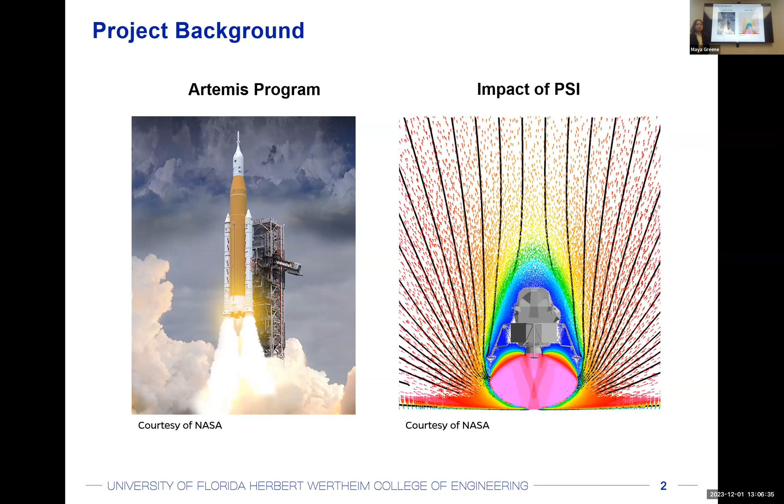Two of the major effects we see are cratering on the surface, which you can see on the bottom of this figure, and ejecta dynamics, which are represented by the red specks in the simulation.

The ejecta dynamics can cause a whole host of negative effects, including creating low visibility for crews during maneuvers, impairing the performance of sensors, damaging structural integrity, and reducing the functionality of mechanisms on the lander. You can see this in the sandblasting of metal surfaces and kicked-up dust getting into mechanisms and clogging up moving parts like gears or sliding rails.

The cratering can also cause a significant issue because it can create an uneven landing surface. For example, the Apollo 15 mission almost failed because one of the legs of the lander landed in a small crater, incidentally also due to low visibility during landing because of the lunar dust. That caused a tilt of almost 11 degrees, which was nearly a mission failure, since the criteria for failure was a 12-degree tilt.

When we consider all those negative effects of lunar dust, that it can damage critical components on the lander or directly lead to failure, the business case is straightforward for the CraterGators' lunar dust mitigation device. It's difficult to estimate the exact cost of a catastrophic failure of the lander due to the regolith, but the contract for the Blue Origin HLS was worth $3.4 billion.

The predicted cost of the proposed CraterGators dust mitigation system is $135,000, which, as we can see here, is a nearly negligible cost relative to that contract for a rather significant payoff in terms of risk mitigation for the mission.

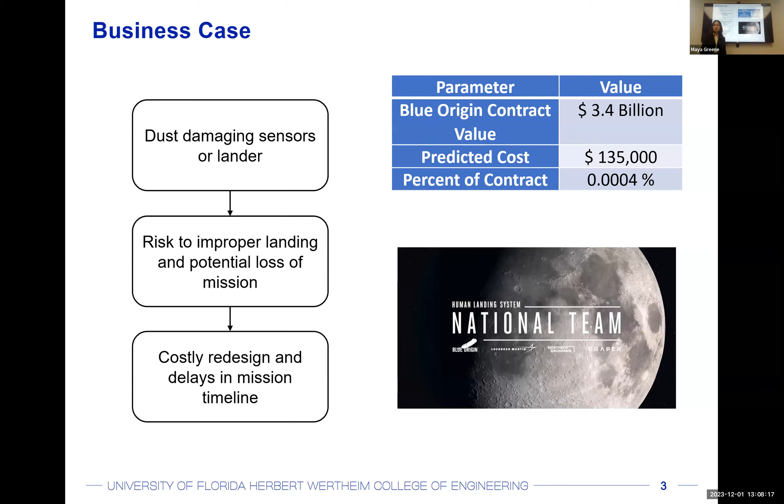When CraterGators went about brainstorming solutions for our dust mitigation device, we had to come up with the critical requirements for this Artemis 5 mission for the national team.

When thinking about these requirements, our number one concern was avoiding as much added weight and cost to this mission as possible. The more weight, meaning more mass on this big HLS system, the more expensive it is going to be. We do not want to create any more added cost to the national team than necessary.

We also wanted to avoid non-renewable resources, and avoid adding any motion or robotics that could get damaged from the regolith. Avoiding this added motion and robotics will make the device very simple, which will minimize as much as possible any damages we might experience. If it's a simple device, it will be a simple fix, with fewer components at risk of being damaged by lunar regolith impact during ascent, descent, and landing.

Additionally, we wanted our device to be flexible to any changing lander designs. As you can see here, we included a few different lander mock-ups, and the design has changed iteratively during the design process. We do expect there may be other engineering design changes as the national team evaluates their lander design up until the launch of Artemis 5 in a couple of years.

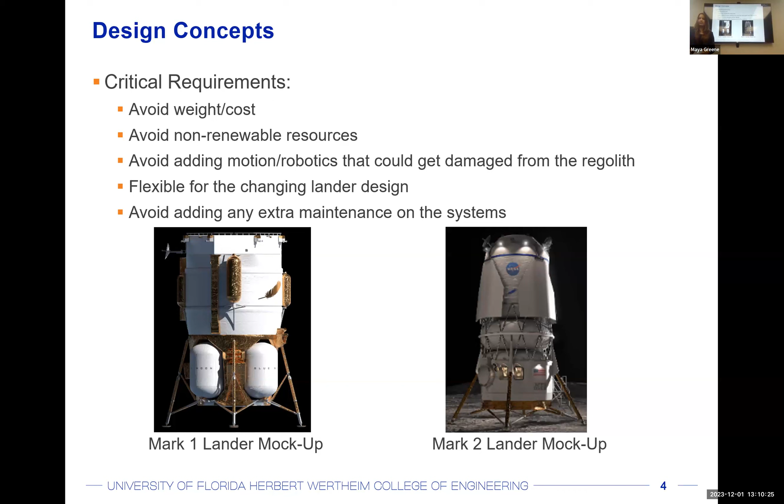Additionally, we wanted to avoid adding any extra maintenance on the systems. If there are any failures of the dust mitigation device that CraterGators proposes, the astronauts on the moon will be in charge of taking care of any maintenance solutions they would have to come up with. So with a simple design, we want to mitigate any sort of action required for the astronauts when we're on the moon.

Our proposed dust mitigation device by CraterGators consists of a deflection attachment and carbon nanotube (CNT) fabric. As you can see here, our dust mitigation device is located on the aft of the lander.

And here you can see our deflection skirt, our undercarriage dome, and our CNT fabric, which will be attached to the lander legs. The deflection attachment, like I mentioned, consists of a deflection skirt and undercarriage dome. This undercarriage dome will be located at the very bottom of the lander. And later on in this presentation, you will be seeing the details of how we go about adjusting for the exhaust nozzles that will also be located on the bottom of the lander.

Additionally, the deflection skirt protrudes outward right here, and this motion right here is meant to allow for regolith flow to move past our lander and thus mitigate any sort of lunar regolith impact on the base of the HLS. This carbon nanotube fabric will be secured to the lander legs via polyimide tape at the ends, which will allow for the fabric to extend along the legs when landing. The legs will retract during landing.

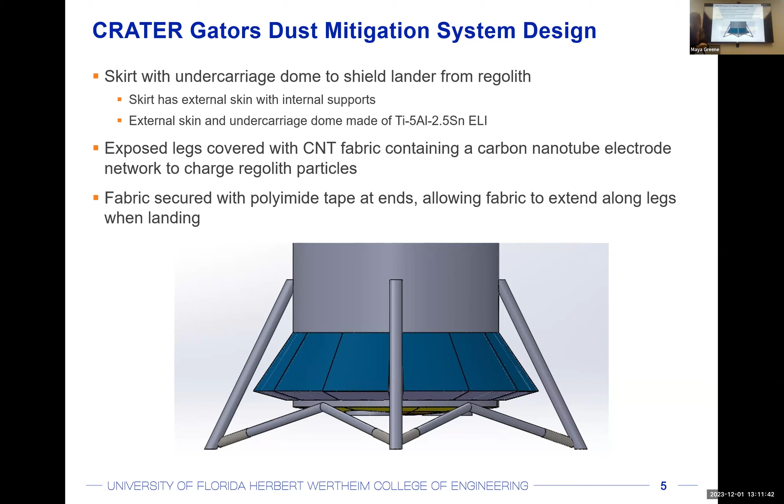So going a little bit more in depth with our deflection skirt. The objective of our deflection skirt is to deflect the regolith from hitting the lander body and also any critical components like sensors that may be on the bottom to assist with landing. In terms of geometry, here's a cutout. It's one quadrant of our deflection skirt. So we have 4 quadrants going all the way around the lander. It's made up of these 3 pieces.

We have a thin exterior skin that is connected to our interior supports via welding, and then the interior supports are then welded to the lander itself. So we have one quadrant, and then there's a lander leg on each end of the quadrant. And so then to protect against any sort of regolith intrusion based off of these quadrant separations, we have shields on the outside of these interior supports to prevent any regolith from infiltrating the system. Additionally, these are made out of a titanium, tin, aluminum alloy.

And so then for sensor recession, we wanted to make sure that our sensors that may be on the bottom to assist with landing are safe from regolith flow. So the way we went about protecting them is based off of the orientation of our skirt on the lander itself. So we see that we have a little bit of a cavity here for our sensors to fit.

So what we're expecting is the regolith will flow from the surface of the moon outwards and hit this corner of the lander itself. And based off of flow over a ledge, it will then flow past the ledge up until it hits the next ledge, which in this case would be this outer bottom edge of our deflection skirt. So that is therefore leaving a cavity here for our sensors to recess inside that stagnation point and prevent any sort of regolith interaction with those sensors.

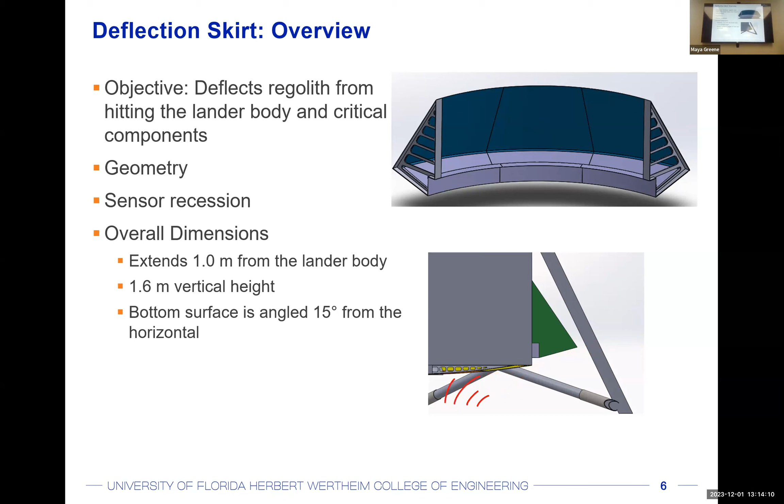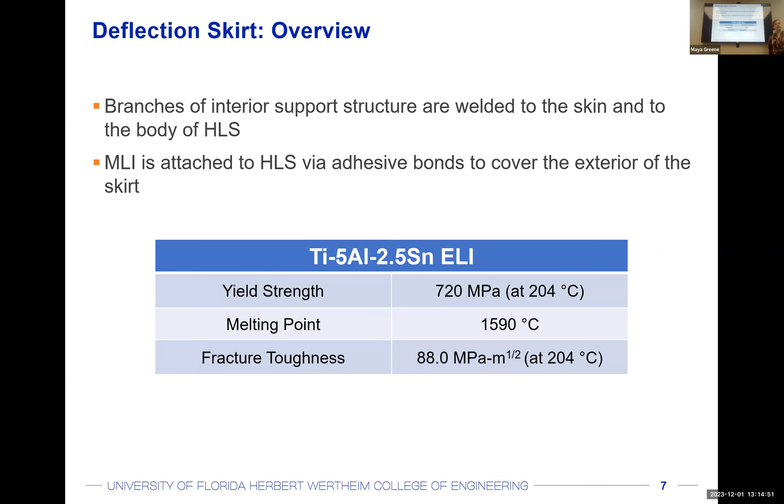Okay, and then I mentioned before that the branches of the interior support are welded to that exterior skin, and then the interior supports are then welded to the HLS itself. And then, as I mentioned as well, the MLI is attached to the exterior skirt with adhesive bonds and covers that entire exterior skin. Here are some material properties of the tin, aluminum, titanium alloy that we chose for our deflection skirt. So we have a high yield strength and a high melting point for any sort of thermal interactions that we will face on the moon, and then fracture toughness in the case of impact from larger regolith particles.

Hello, I'll be discussing one of our static loading cases that we did to ensure that our device wouldn't fail during operation. I'll be discussing the outer skirt as it curves around. In order to simplify the problem so we could perform these calculations, we stretched out the curved shape into a straight beam. We calculated the length of this beam using the angle that it is traveling around and the radius of the section.

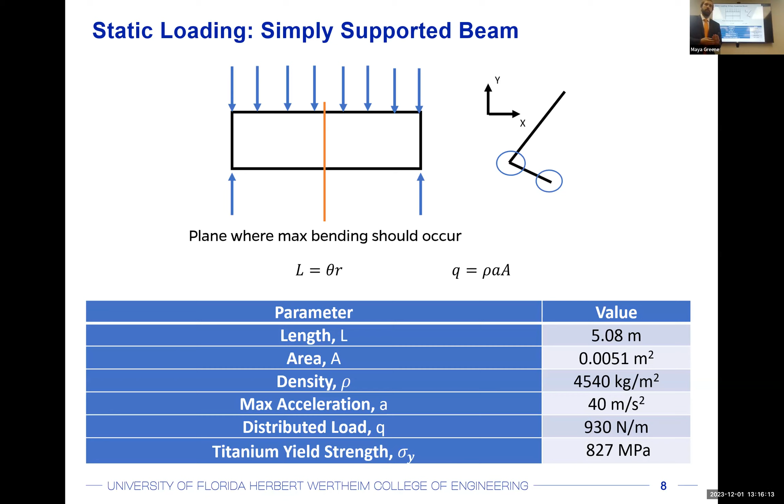And then for the loading, it was a distributed load across the length of the beam with simple supports on either end. Bending was assumed to cause maximum stress, and the plane of maximum bending would be in the center of the beam. The load was calculated using the maximum acceleration that we predicted our device would see, which would be during launch from Earth. We used the maximum acceleration from the SLS launch vehicle, and while the Blue Moon lander will not be flying on the SLS, the New Glenn vehicle does not yet have data published about its potential max acceleration.

Additionally, due to the open cross section that the beam has, we had to take into account the products of inertia as well as the moments of inertia, and multiple points. We calculated the stress at multiple points along the outer edge to ensure that we found the point with the maximum stress. The point that we had the maximum stress was the far left corner of the beam, and had a stress of 5.35 megapascals.

This provided a factor of safety of 154, which is a very large factor of safety, much higher than the industry standard of 1.5 to 2. But we deemed this acceptable as we were more concerned with the potential failure during fatigue or crack growth analysis, as well as the thermal cases.

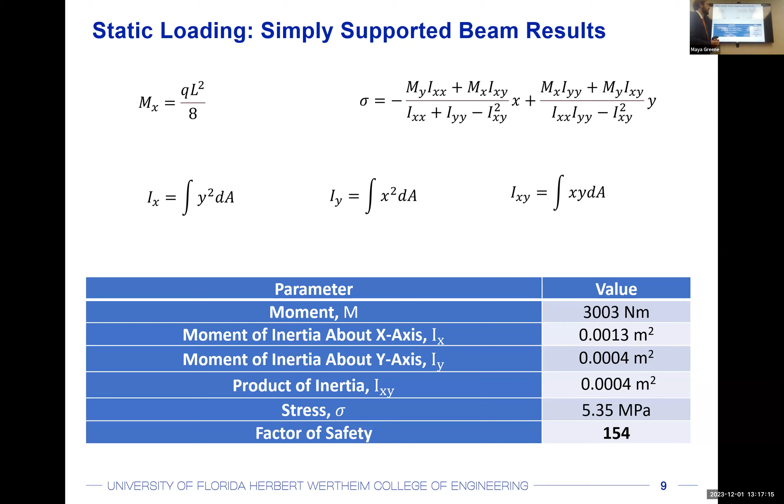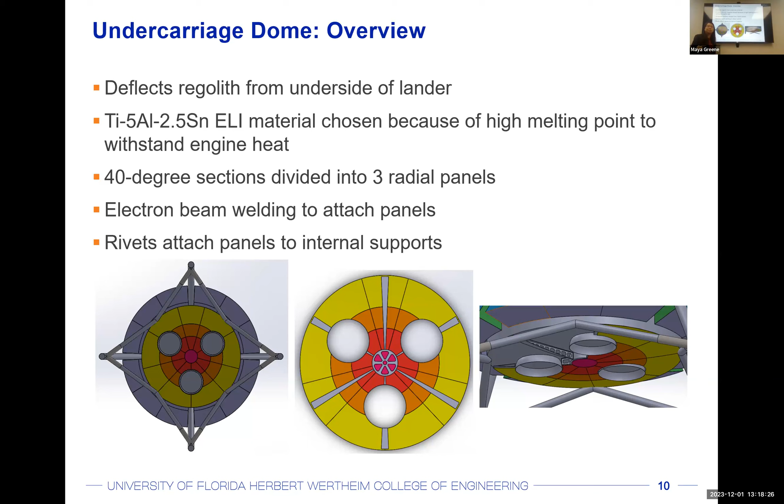A static loading case was performed for the undercarriage dome, just as we performed it for the deflection skirt. So in this case, we simplified the skin of the undercarriage dome for analysis purposes by removing the hole cutouts for the engine bells, as well as flattening the skin.

From there, we determined the distributed load Q as a function of the density of the titanium alloy, the thickness of the skin, and the maximum acceleration that the undercarriage dome would experience, which again, just as we did for the deflection skirt, we determined would be the G's felt during SLS launch.

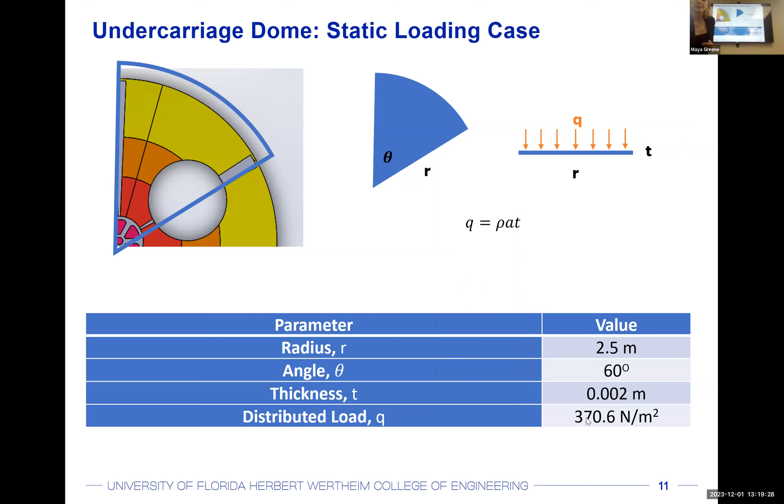From there, we were able to determine the equivalent von Mises stress using the tangential stress, the radial stress, and the weld factor, which we estimated to be 2.

From there, we calculated the safety factor as a relationship between this von Mises stress and the yield strength of the titanium alloy. And we determined a safety factor of 3.4, which, although is higher than the industry standard of 1.5 to 2, again, we were mostly concerned with how the design withstood cyclic loading as well as thermal loading, so we deemed this acceptable.

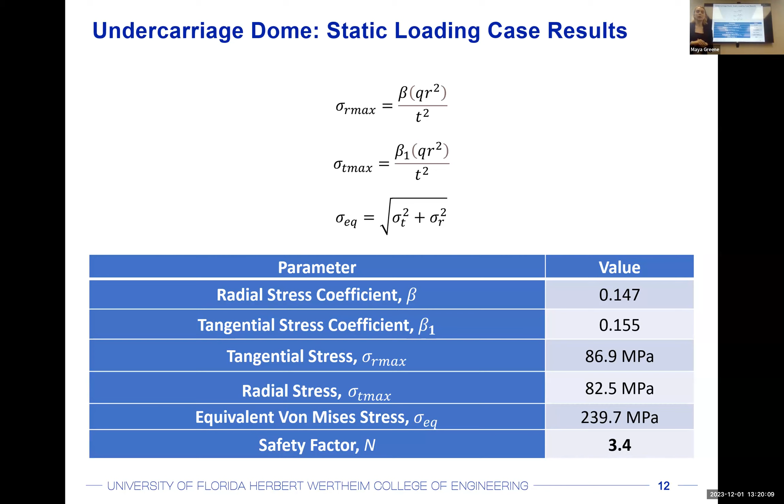Like Rita said, the most important structural analysis that we took the greatest stock in when we were performing our analyses was a fatigue loading case. Fatigue in this case and cyclic loading was defined not as repeated ascent or descent of the lander, but rather as impact coming from the regolith itself repeatedly during descent.

For this case, we needed to establish a load case, which given the wide range of sizes of regolith that the moon has, we wanted to go for something that would create a significant enough load to cause an effect without being so large that it wouldn't actually be kicked up during the surface plume interaction. And so for that, research was done on the sizes of boulders that you might experience on the moon.

It's known that around 90% of the regolith on the moon is going to be on that micron level size. And so when selecting a load case, we went for the smallest size that is still deemed as a boulder on the moon and took that to be the load case that we might expect to impact repeatedly. Larger size boulders, we wouldn't expect to see a large amount of kicking up and impacting the skin.

Properties of lunar dust regolith were then applied in order to calculate a mass, and then velocity and acceleration that we might expect when impacting the structures was taken from either experimental data on lunar regolith dynamics or information about the Apollo experiments themselves. And this led to a calculated maximum stress in the load case of 532 megapascals.

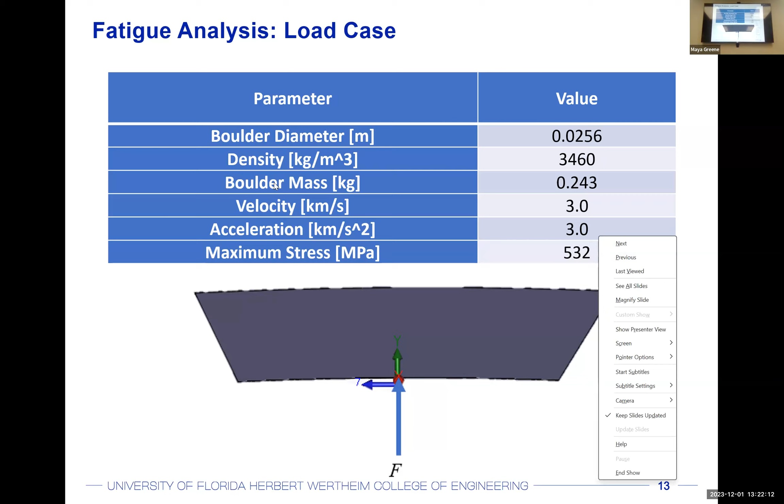All right, so to go through the analysis itself, the amplitude and mean stress were calculated based on that maximum stress on the previous slide and a minimum stress just assuming 0 with no impact. The fully corrected endurance limit and a fatigue strength factor were taken into account as well for our material itself and our geometry. And then an equivalent fatigue strength was calculated using that amplitude as well as ultimate strength of the material and was calculated following the Goodman relationship.

The cycles to failure was then calculated using this calculated equivalent fatigue strength as well as the other parameters discussed. This resulted in a life of 129 cycles. Again, given the variability of the dust on the moon, we were aiming for a cycles to failure somewhere around this range in the low hundreds. For very massive boulders that you wouldn't expect the PSI to even kick up, you would get cycles incredibly low, but for the very small dust, you could get cycles just incredibly high.

So this went for something on sort of the average case that we might expect to see from larger size boulders that might impact the structure. And 129 cycles was deemed acceptable in this case, again, based on the statistics related to the size of the regolith that we would actually expect to impact the lander.

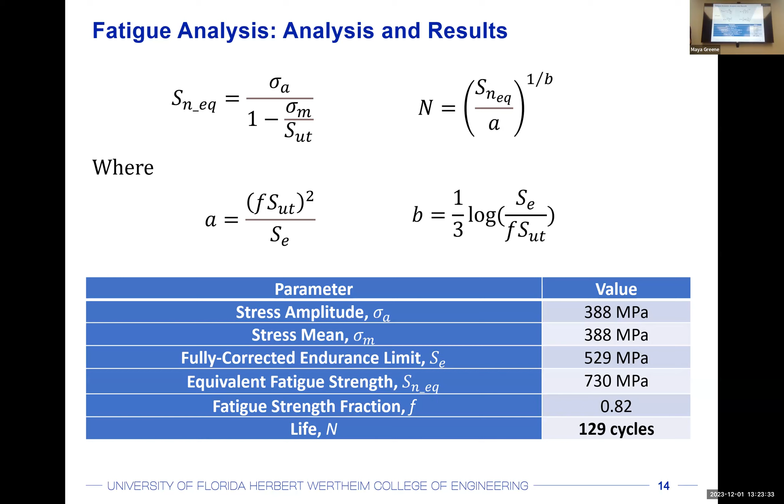In addition to this, again, since this was the load case we were most concerned about, we also performed a crack growth analysis. The crack growth analysis was performed around the rivet holes that were going to be drilled into the skin, and that was taken as a potential place where we might see crack growth based off of repeated impact. In this case, the moment at those points was calculated, and then taking that initial crack length, assuming the rivet sizes where we might see a crack form, we were then able to calculate, based on the material properties, the constants C and N for calculating a life during crack growth as well.

So we were able to calculate a range of fracture toughnesses as well as the rate of crack growth, and then bring all of that together along with the material properties in order to determine that even with a crack at our rivet holes, we could still see a life of 25 cycles. And this was also the range that we were looking for, again, assuming the sizes of the regolith that we would expect to impact our lander.

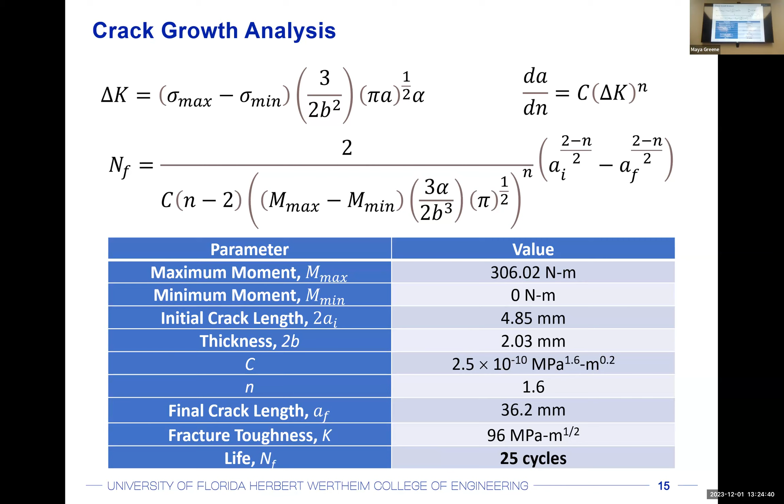Another potential failure case for our lander was, of course, a thermal analysis case. In order to do this, we also had to make some limiting assumptions to develop this load case. And so we decided to model the regolith flow as a convective flow. Typically, that's not modeled in a space atmosphere due to the lack of medium. However, due to the multitudes of regolith that our deflection skirt could experience, we decided to model it as a convective flow with the regolith itself being the medium.

We also had to determine what temperature the regolith would be when hitting our deflection skirt. We did decide that the thermal impingement from the engine plume is what would heat up the regolith during flow, and then thus that could get kicked back up and transfer that heat back up to our undercarriage dome.

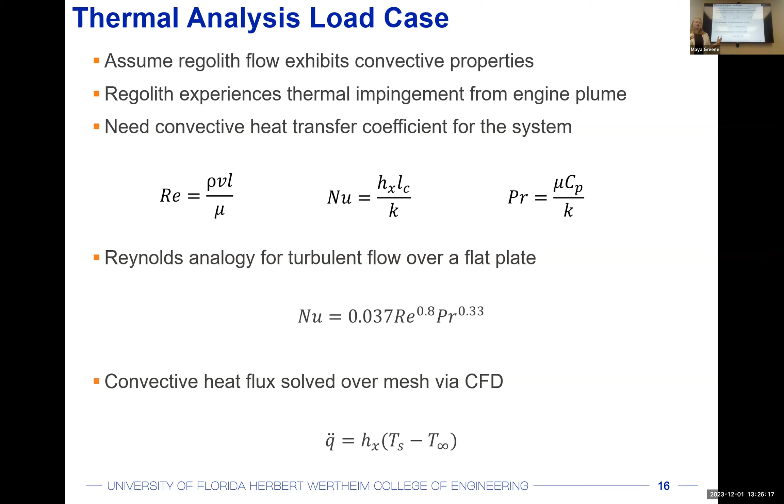In order to do the convective heat transfer load case, we needed to find the convective heat transfer coefficient for the system. We found Reynolds number, Nusselt number, and Prandtl number via a variety of properties of the lunar regolith, as well as some characteristic lengths of our lander. The Reynolds number proved to us that we were experiencing some turbulent flow, and the Nusselt number and Prandtl number were used via the Reynolds analogy in order to find that h(x), that convective heat transfer coefficient. That, again, is a system property that will help us solve that convective flow problem. And then we wanted to find the heat flux associated with that heat transfer coefficient over the mesh of our deflection skirt via CFD.

The results: we found that the undercarriage dome was the limiting case. We did model both the undercarriage dome and the deflection skirt, and the undercarriage dome was found to be limiting. At the top, you see a temperature map. At the bottom, we see a heat flux map. In the temperature map, we see a pretty much constant temperature over the top of our image here. That will be the surface experiencing the regolith flow and experiencing the change in temperature. We found that max temperature to be 73.2 degrees Celsius, which is within the range of the titanium that we chose.

Furthermore, we see the heat flux magnitude is at its maximum in this corner. That is expected due to the highest delta T that will be experienced. And that maximum magnitude was around 29,000 watts per meter squared.

From that, we decided that it was just a point that we needed to reference and make sure that there was no failure or deformation of material at that maximum heat flux location. And as this is supposed to experience some reflight, that would be a point that our team would want to analyze to ensure it maintained its structural properties.

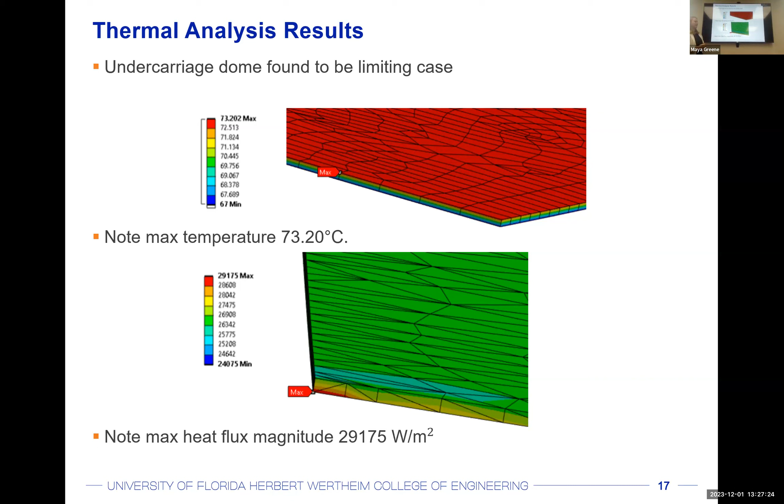The other major system on our design is the carbon nanotube, or CNT fabric. This fabric is used to cover the sensitive hydraulic shafts that are on the lunar legs as they extend and retract during ascent and descent. This fabric works because it has a network of carbon nanotube electrodes through it.

This network consists of two parallel rows, which have extending columns of carbon nanotubes out of it that do not connect. These parallel columns have 1 millimeter spacing, and when an alternating current is sent through it, it will generate an electric field around the fabric, which will push the charged dust away from the fabric.

This design is derived from a spacesuit dust mitigation system, which conducted experiments on a sample of fabric and found that it was 80 to 96% effective on the dust samples they used. The fabric itself consists of an outer layer of Orthofabric, which is 0.5 millimeter thick. This is where the electrodes are actually stitched into.

This Orthofabric is a tear-resistant fabric made up of a mix of Kevlar and some other materials. Below that layer is a 0.6 millimeter thick layer of a thermal micrometeoroid garment. This is a mix of 5 alternating layers of aluminum mylar and non-woven Dacron, and then a bottom 0.2 millimeter thick layer of neoprene-coated nylon.

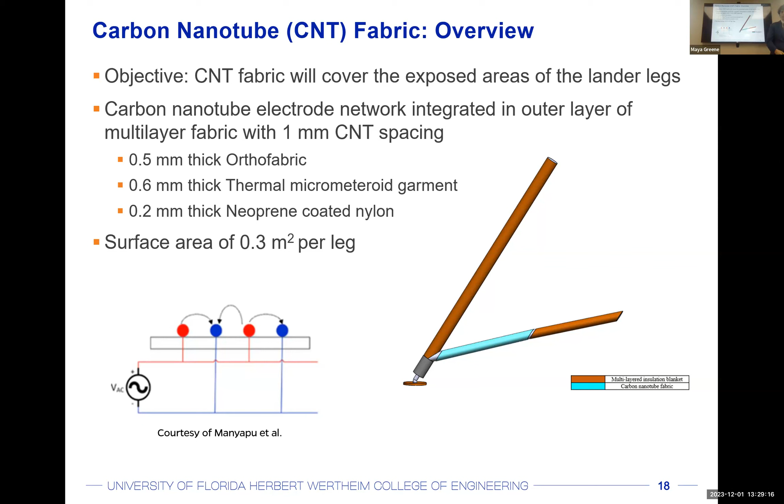This construction allows for it to be fairly resistant against impacts from lunar dust, which will also help during descent and ascent. We conducted an electrical analysis on this to look at the power draw of the fabric. Due to the layout of the fabric, the power draw will come from the internal resistance of the carbon nanotubes themselves. And this was modeled as many resistors in parallel due to the majority of the carbon nanotubes being in these parallel columns.

Because of that, we were able to scale up the power draw of the test sample from the experiment. And using our total area of just over 22,000 centimeters squared, we found that at maximum power draw, it will use just under 1 watt. This maximum power draw occurs when there is a lot of dust being removed from the fabric, whereas the idle current, when the fabric is just sitting idle on the legs, will use just under 1 milliwatt.

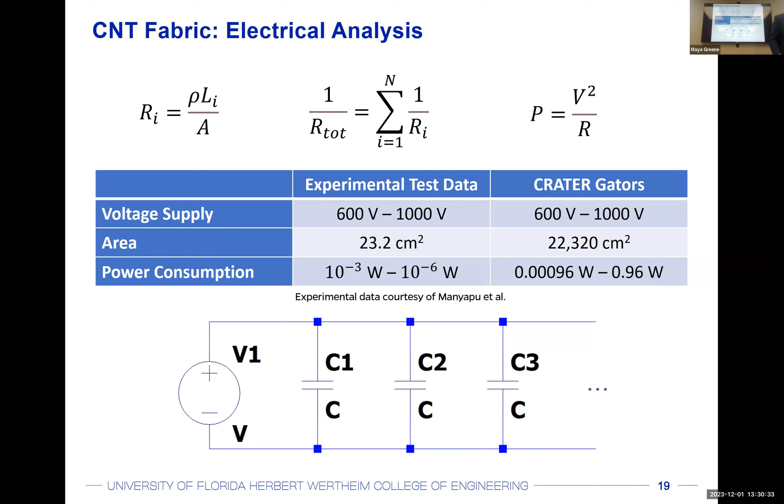Because of this low power draw, we determined that it was adequate to wire this directly to the main battery of the lander itself and did not need an external power source. As the CNT fabric was one of the more complex systems on our design, we wanted to do a thermal analysis to ensure that there was no damage caused to the electronics of that CNT fabric.

We decided to model that via radiation in order to identify the heat dissipation ability of the fabric. In a worst case scenario, if we assume that all the power drawn by one section of that fabric transforms to heat, we ran that radiative calculation and found that the thermal equilibrium was reached at 55 degrees Kelvin. That is under any expected electronic failure of that CNT fabric. We just wanted to make sure that we weren't going to experience any of that failure. So again, our limiting case is not concerned with the heat generation of the CNT fabric.

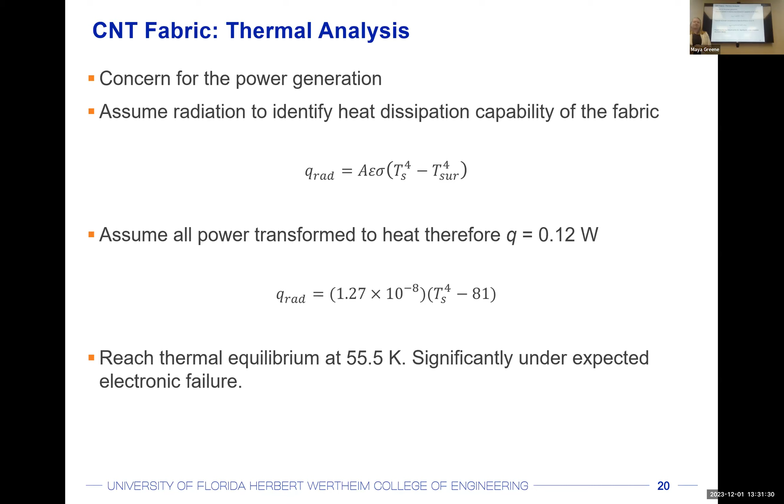So in conclusion, the combination of the deflection skirt, undercarriage dome, and the CNT fabric will allow this design to mitigate the risk of lunar dust of all different sizes. Because these are passive solutions, this reduces the power requirements and minimizes the number of potential failure points. Based on the cost estimations, it also is very cost effective. So because of these factors, this design is a highly effective solution for preventing the negative effects of plume surface interaction.

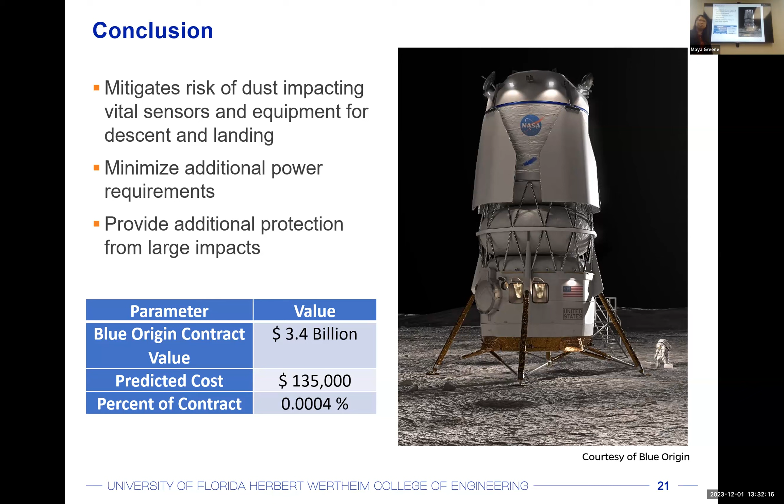Great job. You guys can clap for yourself. Tom, do you have any question? Ask first. Oh. Let's try. Yeah, you can check the chat message. That's why you could have had a high grade for structural analysis. Yeah, guys. Who is your audience? Thank you. Oh, we do have. I can say it.

Yes, our mass we calculated to be just under 7 kilograms for the entire system. That includes a bit of extra mass for any weld material.

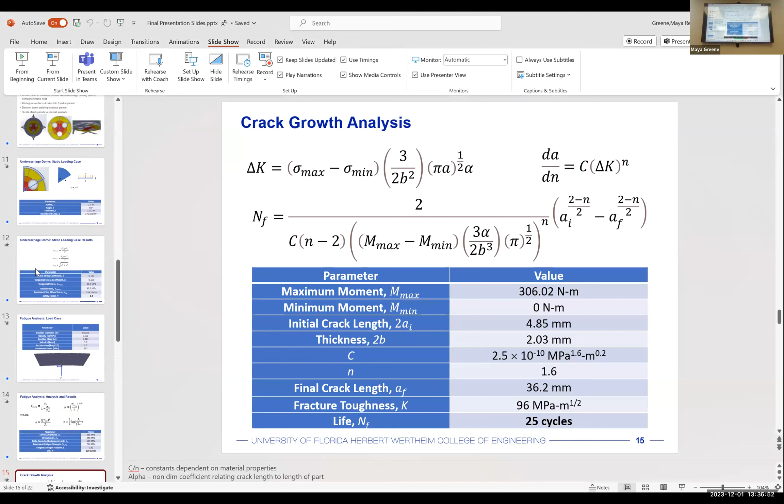I was on the fatigue side, yeah. It's not 15. Yeah, like a target amount of regolith to deflect or keep from impacting anything. Yeah.

I think that to build on Aaron's response, it's also difficult to quantify because we're also trying to combat the regolith on the submicron scale. And given the information that we have on their specific sensors, the arrangement of their sensor array, and what those sorts of sensors can tolerate in terms of both impact, but also particulate counts in the fluid around it, like parts per million of the regolith, it's difficult to quantify a requirement given that we don't know how their sensors perform.

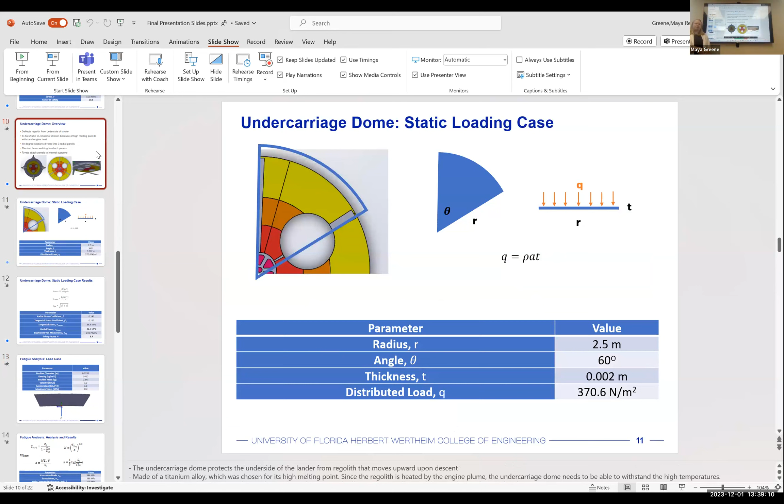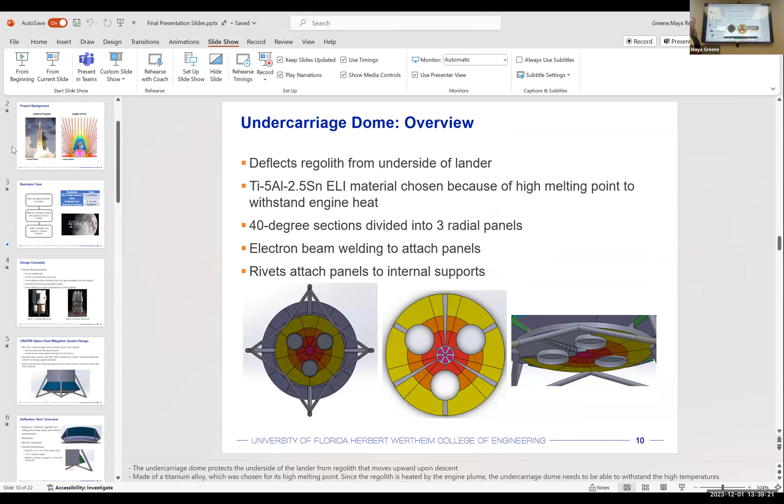So we were not expecting any regolith to be shot directly back up into the undercarriage of our design. Thus, we weren't expecting any little particulates to seep into those gaps right there, which is why a majority of our design was expected to protect this side of the lander. And obviously, as this gets closer to the lunar surface, the cratering goes further down, thus we could experience some more ejecta dynamics closer to the center, but we are not expecting any true lunar dust to be anywhere near those gaps that we have in the undercarriage dome.

Regarding the electric field, that is specifically for sensitive components like hydraulic shafts that abrasive dust might scratch up or get into seals. It's very localized to where the fabric is, and we don't have fabric on the undercarriage dome or skirt itself, as those are not as sensitive as things like the hydraulic shafts.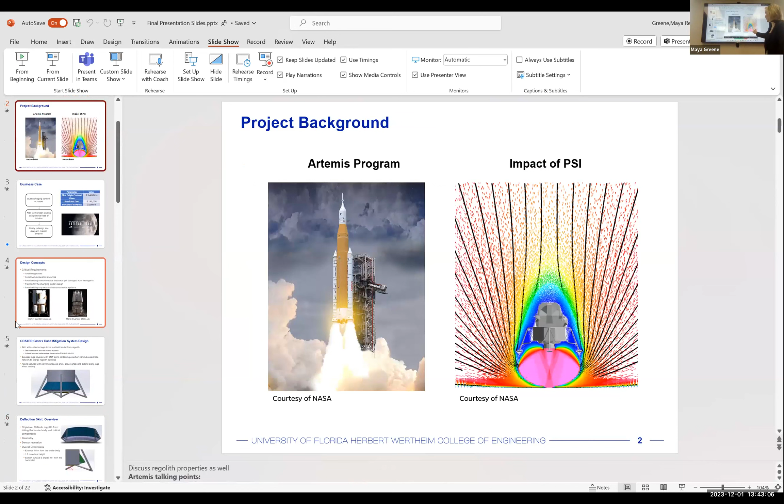The purpose of that animation is just showing how the dust would be deflected. That is based on an image we have on one of the first couple slides, where we see all those particulates - that's what I based the animation off of. It's not necessarily quantified, but that was the motion we would expect when landing - how the particles would move.

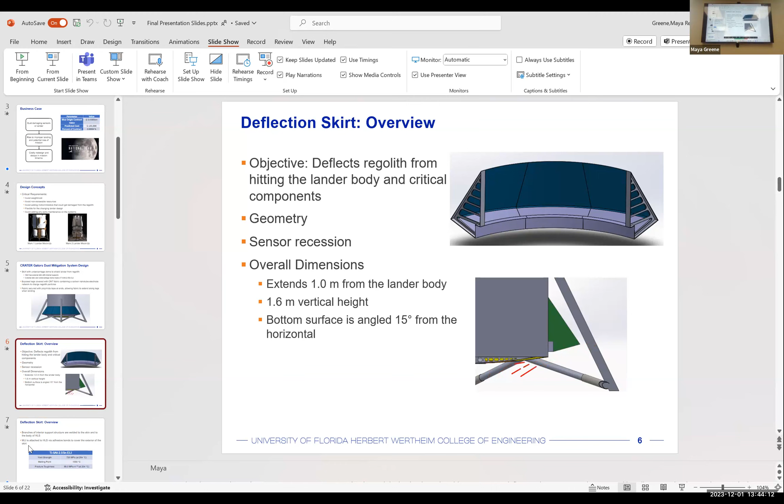Specifically for joining the panels of the skirt, we chose welding, specifically electron beam welding, for a couple of reasons. First, electron beam welding allows the most retention of strength for butt welds. Other options would have been TIG welding, which also allows quite strong joints. Another reason electron beam welding was attractive is because it's pretty commonplace in the space industry, so a lot of aerospace companies would already have access to large EB chambers. The third reason we were attracted to the electron beam process is because it's mechanized. While TIG welding has some automated processes like orbital welding, we liked that electron beam welding allowed for a high level of precision when joining those panels together.

The reason we chose to weld the panels together as opposed to having one uniform piece is for manufacturability reasons. We were concerned about precision over that large of a part if it was a single piece. Also, I imagine it would require some sort of large die to create the curvature we wanted, and the cost of that fixturing and setup was estimated to be greater than joining panels through welds.

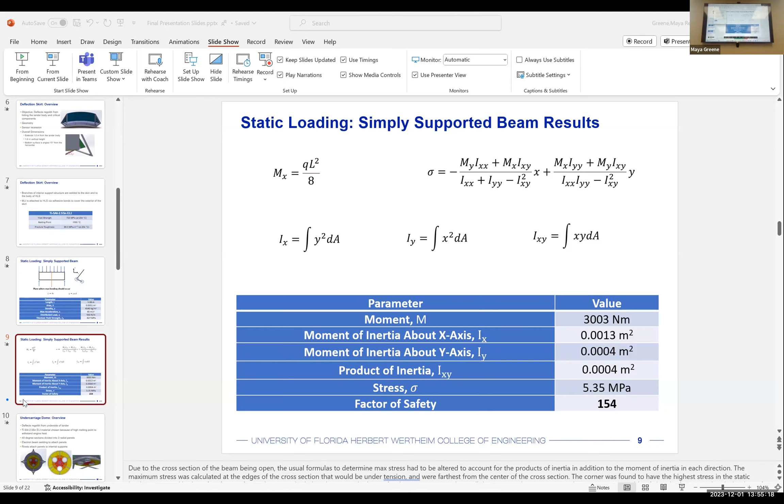For the fatigue analysis, the only way you can use the equation is when the fatigue cycle is between 10 to the third and 10 to the 6th. That is the stable propagation phase, and that is the equation to model that phase. Below 1,000 cycles, we cannot really use this equation. So when you get a life cycle of 129,

it's not really in the region that we can use this fatigue equation. Do you guys remember the log scale SN diagram - the initial propagation, stable phase, and rapid propagation, with the straight line in between? That is the second phase, and that is the phase where we can use this equation, that's how we derived it. So if you want to use this equation, the range is 10 to the third to 10 to the 6th. If you're outside this range, like at 129 cycles, this equation really cannot be used. Probably this part we need to redo.

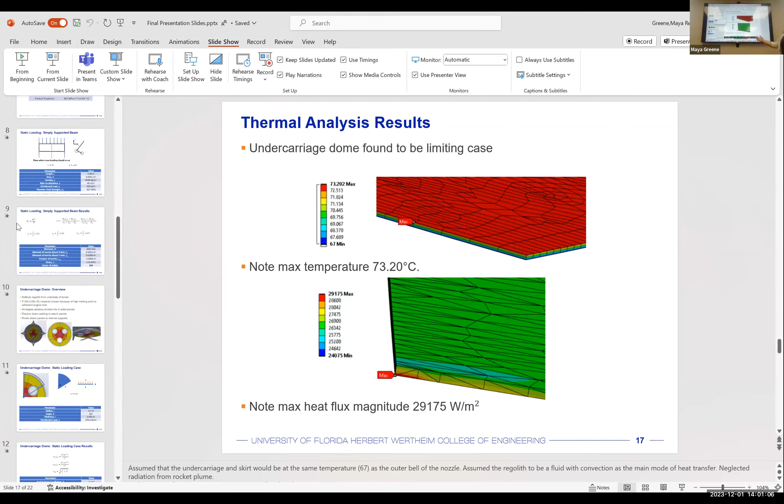Yeah, the values for the yield strength are above that as well, but that was not taken into consideration when we did our thermal analysis.

That was our hope as well. Sorry. Yes, we could still consider it, but we should keep that engaged.

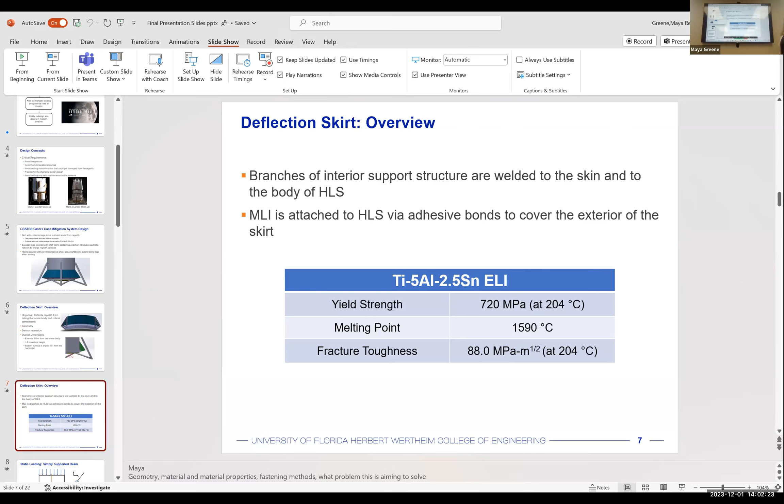Don't want to have one of those Mars Explorer moments, whatever that craft was. They used a contractor, used English units instead of metric.

In order to get the maximum stress, I'm the one who calculated this load case. I did research into the sizes of regolith expected on the moon and what's qualified as a boulder, the smallest diameter boulder we could experience, which is where the initial boulder diameter came from. The density is pulled from properties of lunar regolith, focusing on the rocks themselves, not just the dust.

Mass was pulled using properties of the regolith, and velocity and acceleration I gathered from research on how regolith reacts when landers are landing, especially from the Apollo missions. I was able to find velocity data, but I wasn't able to find acceleration data, so that's an assumption based on that velocity, just assuming a time that's involved.

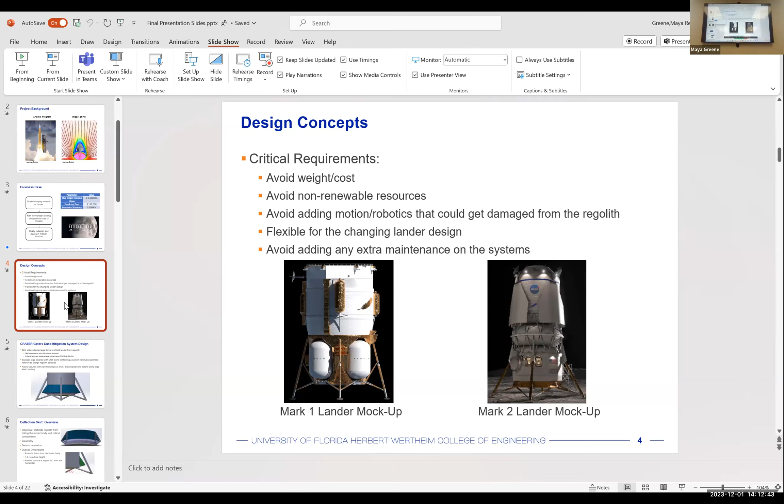Yeah, we were taking one section of one of the legs, so there's 4 legs on there. We were just doing the analysis of one of the sleeves of the CNT fabric. The assumption was that we were going to be landing on one of the poles of the moon, which is typically not in sunlight. So we were assuming it was not experiencing any thermal radiation from the sun.

Again, we are not entirely privy to that information, but during our analysis, we did assume that we were landing in shade. I think the question is, could we land in sun if we had to? Oh, sure. Yeah. We didn't do the analysis on it. I don't perceive it would be a problem if we were landing in any type of thermal radiation from the sun, but obviously we would have to do some more experiments and more analysis on that via modeling that thermal radiation. Again, we're mostly concerned about electronic failures, so that's what we'd be focusing on for the CNT fabric thermal analysis.

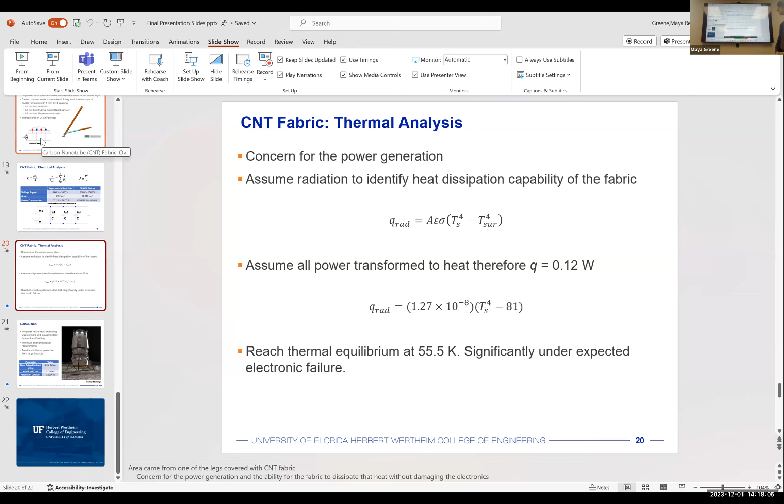The resistance of the CNT fabric to debris kicked up by landing is a small concern, but again, based on the construction, it's made out of very tear resistant materials, and it's also not too sensitive to damage, as the actual driving electrical components are within the lander itself. So although it may see some damage from potentially small boulders, it is expected to be fairly resistant.

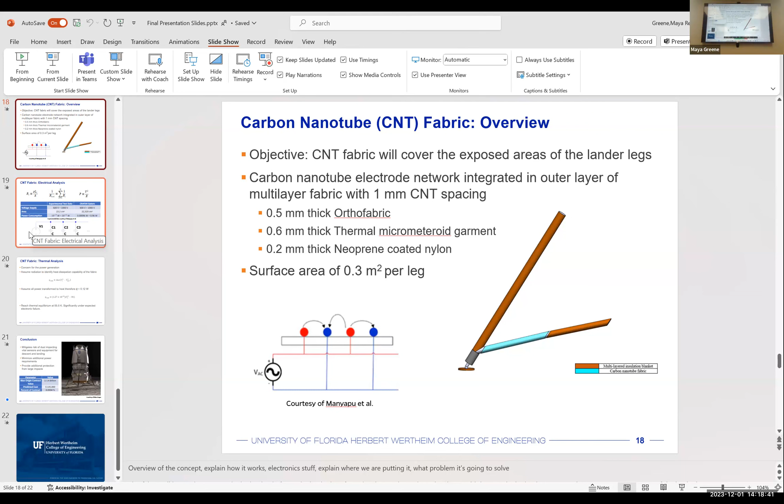Yes, currently our budget is just materials. We attempted to take into consideration how long it may take to manufacture and assemble these large assemblies, but that was difficult, and we weren't able to determine the value in time for this presentation. The majority of the material cost is, I believe, for the titanium alloy sheet metal. And the CNT fabric costs like 30K, so I guess the 100,000 is in the sheet metal and support structures.

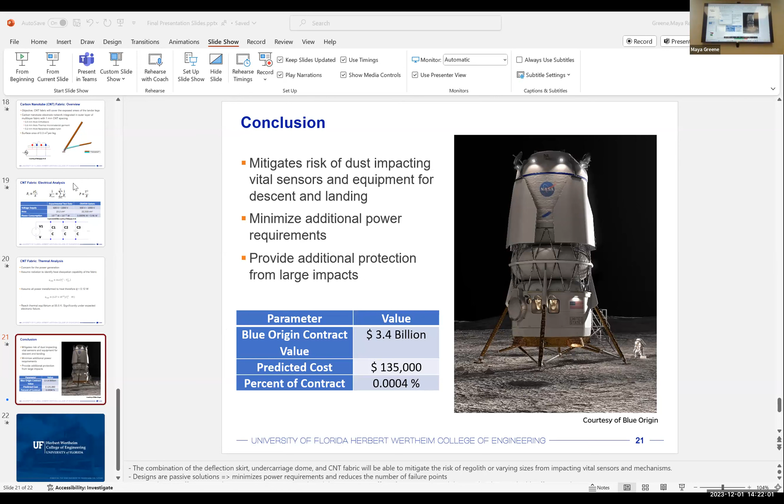First of all, I want to apologize for being a little bit late, but you guys did a great job in your presentation for what I saw. But I've just got 3 questions that are itching at my brain. In terms of how the skirt is and its geometry relative to the legs themselves, how do you expect the legs to contract exactly? Yeah, I guess we didn't show it very well. Yeah.